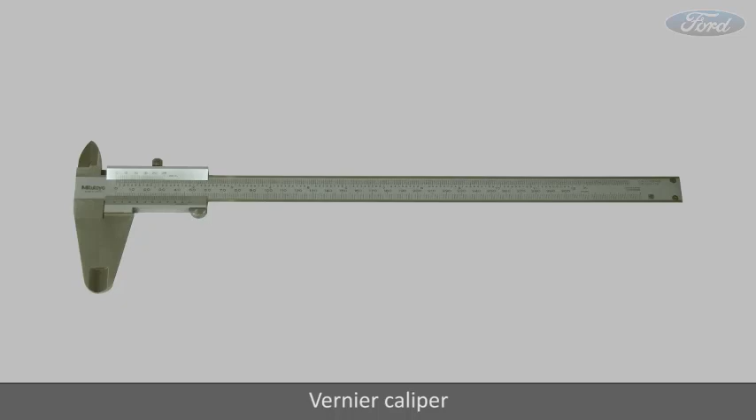The tools required to carry out this procedure are vernier caliper, inner bore anvil gauge, digital dial gauge, micrometer.

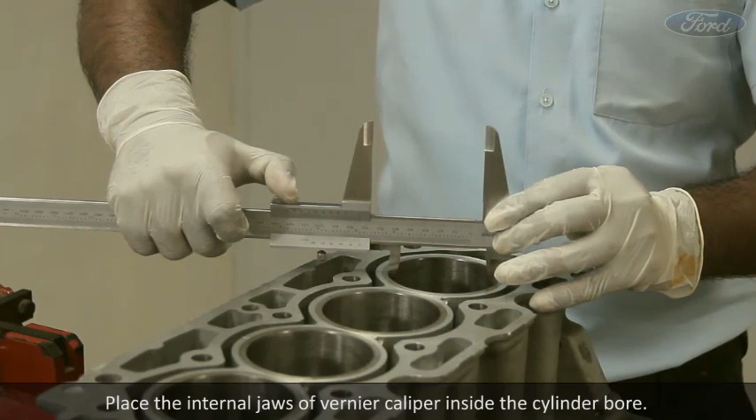Procedure. Step 1. Place the internal jaws of vernier caliper inside the cylinder bore. Step 2. Make sure that the vernier caliper is placed parallel to the cylinder bore. Step 3. Record the maximum reading. This is an indicative reading to help us select the correct anvil.

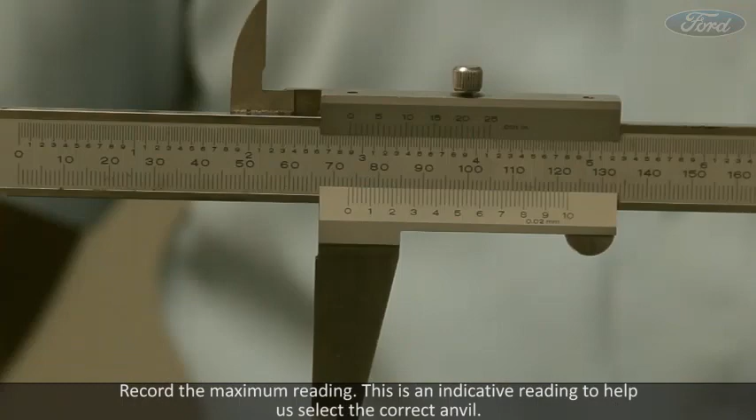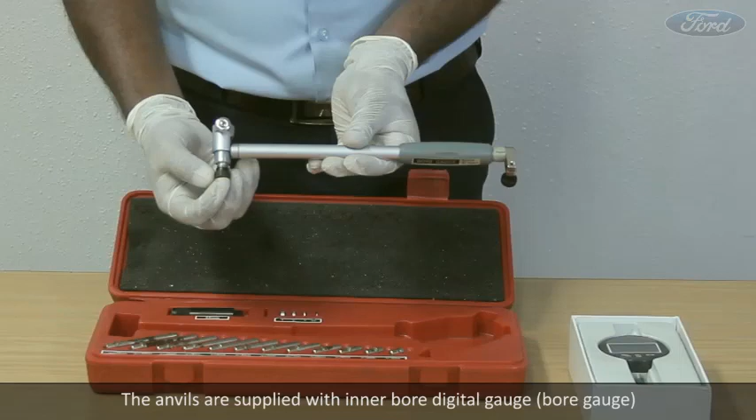Step 4. Use the reading from the previous procedure to find a suitable anvil. Step 5. The anvils are supplied with inner bore digital gauge, bore gauge. Reading is equal to 73.34 mm.

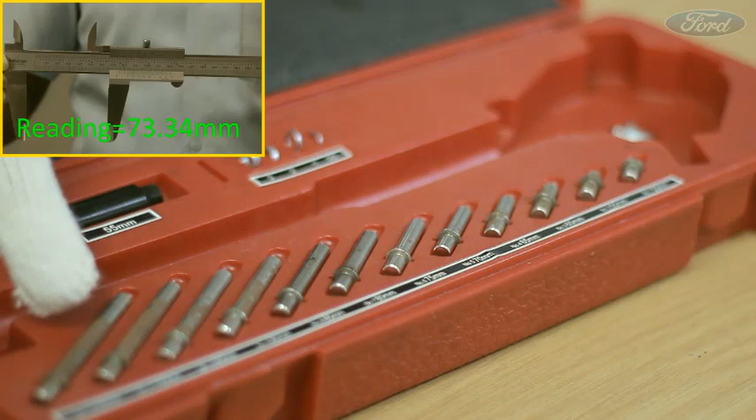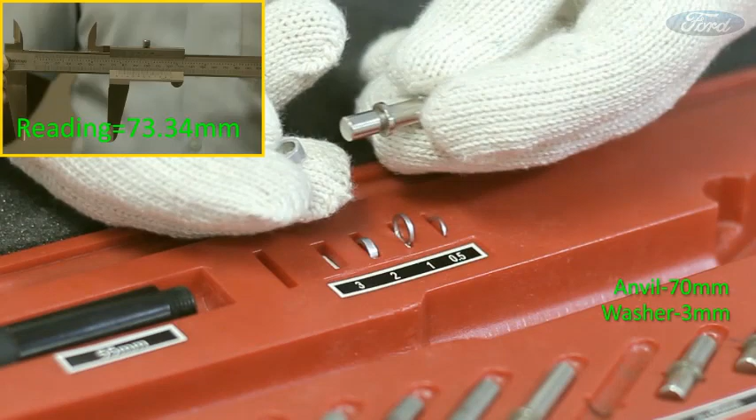Anvil is equal to 70 mm. Washer is equal to 3 mm. Washer is equal to 1 mm. Anvil length 70 plus 3 plus 1 is equal to 74 mm.

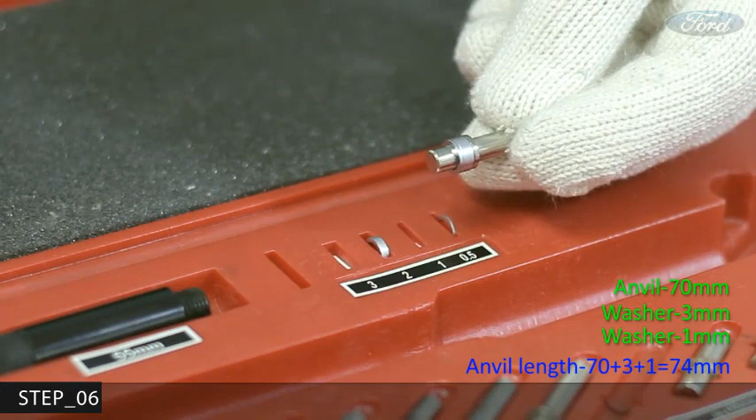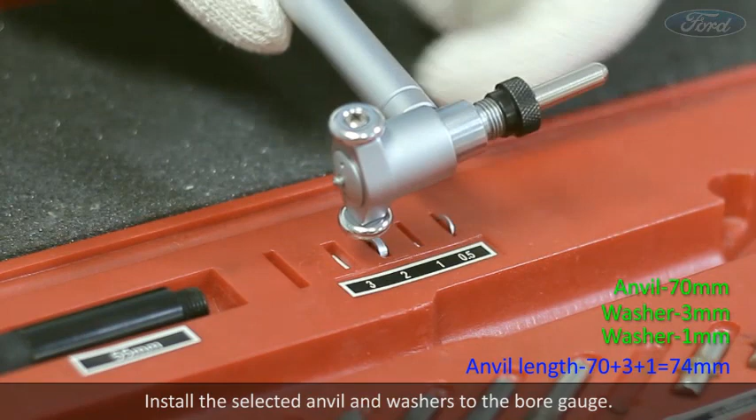Step 6. If necessary, use applicable washers supplied with bore gauge to adjust the anvil length. Step 7. Install the selected anvil and washers to the bore gauge. Step 8. Set up the bore gauge and zero out the readings.

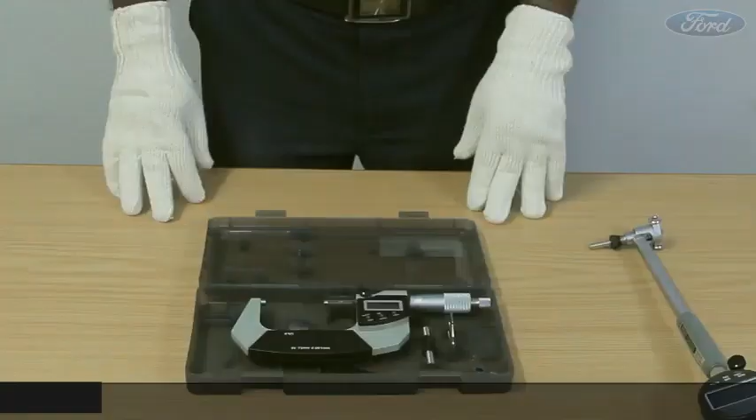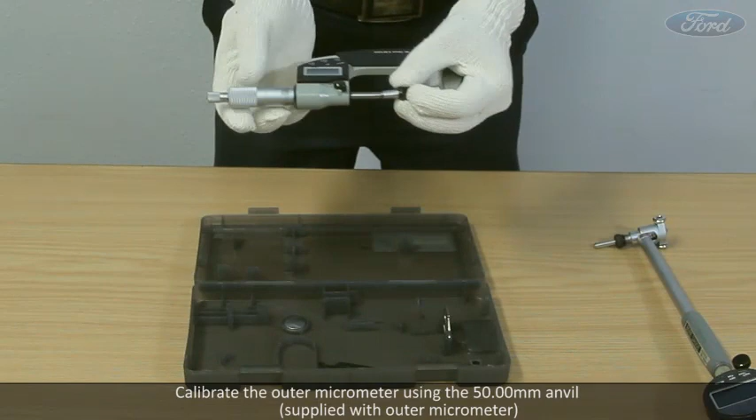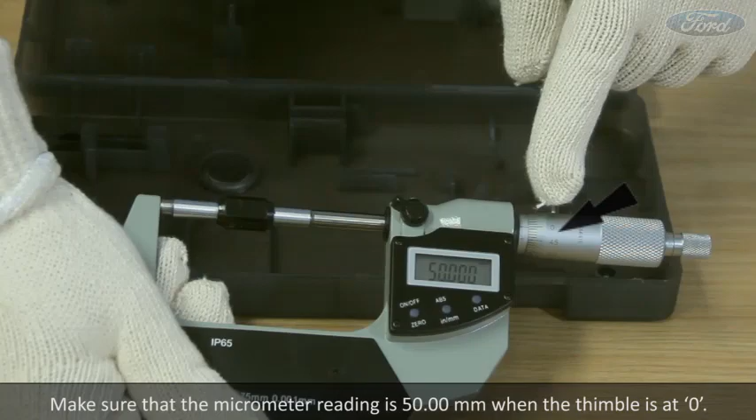Step 9. Calibrate the outer micrometer using the 50 mm anvil supplied with outer micrometer. Step 10. Make sure that the micrometer reading is 50 mm when the thimble is at 0. Step 11. Use outer micrometer to measure and calibrate the bore gauge.

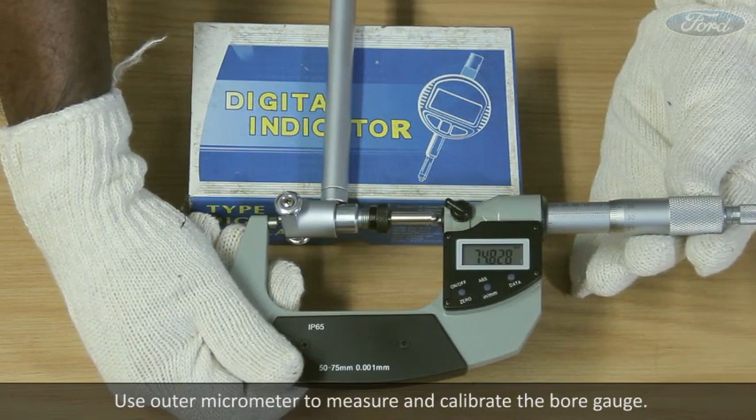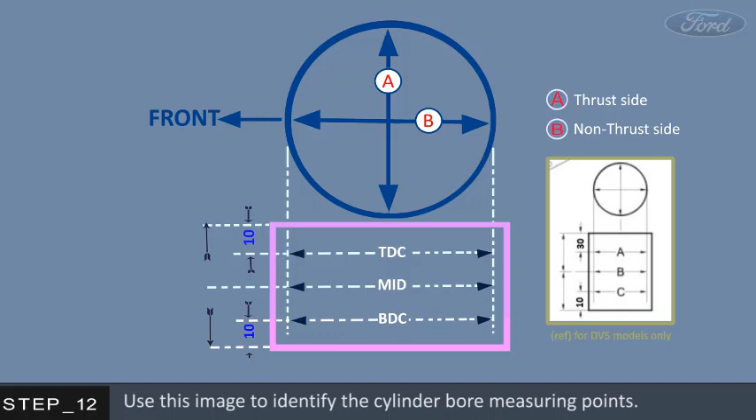Step 12. Use this image to identify the cylinder bore measuring points. Step 13. Use the depth measuring vernier caliper and a marker to mark the cylinder bore length at 3 positions. Mark the TDC and BDC points. Refer the workshop manual for that particular model. TDC and BDC values are different for each model.

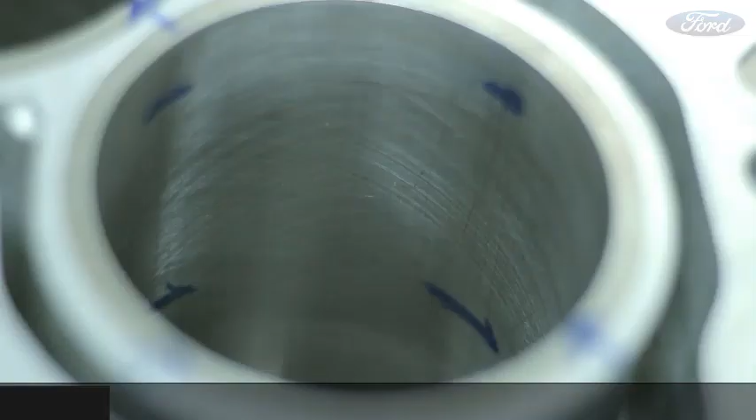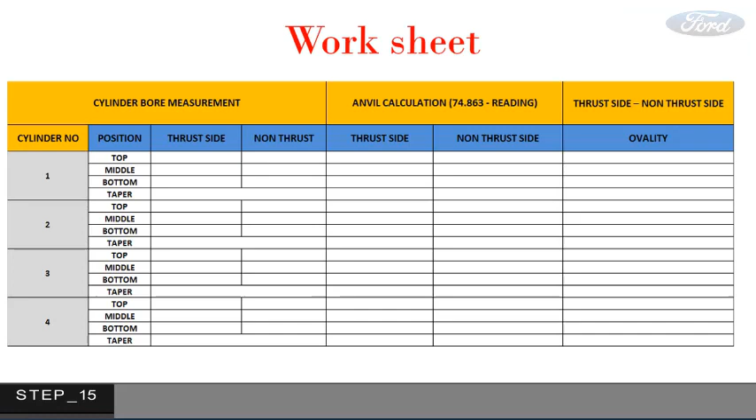Step 14. One at the bottom, one at the middle and the remaining at the top of the cylinder bore. Step 15. Use a worksheet to note down the cylinder bore measurements. Step 16. Make a note of formulas and use these for final calculations.

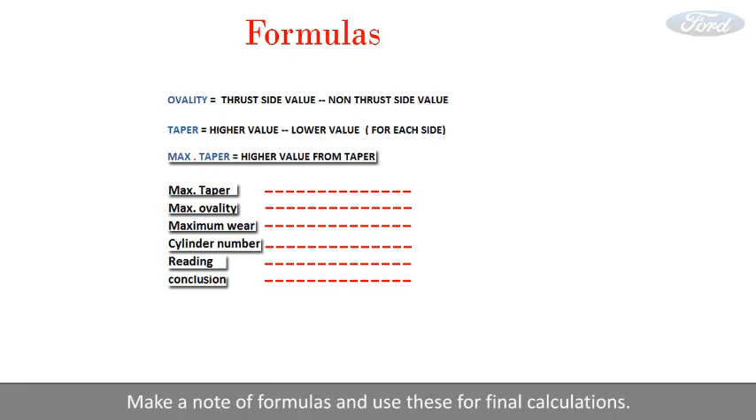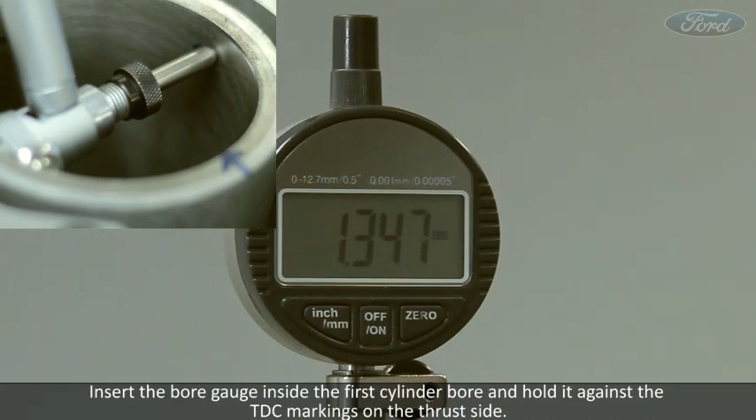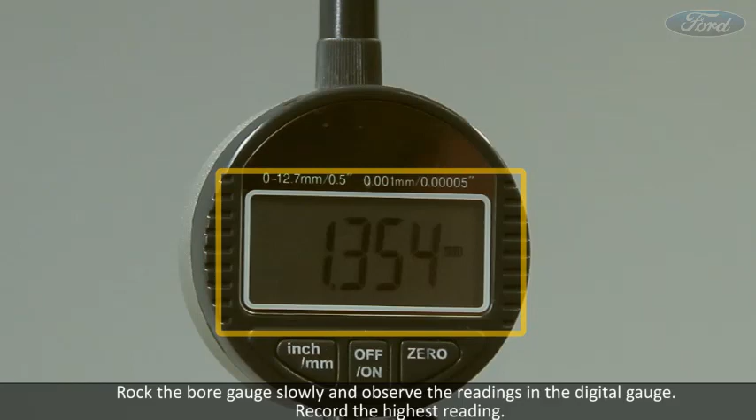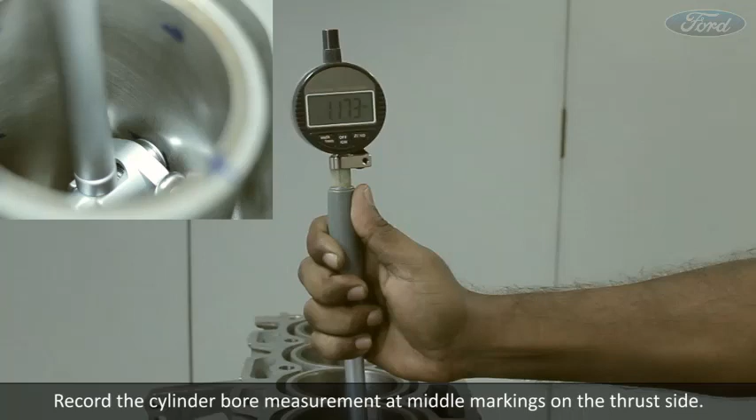Step 17. Insert the bore gauge inside the first cylinder bore and hold it against the TDC markings on the thrust side. Step 18. Rock the bore gauge slowly and observe the readings in the digital gauge. Record the highest reading. Step 19. Record the cylinder bore measurement at middle markings on the thrust side. Step 20. Record the cylinder bore measurement at BDC markings on the thrust side.

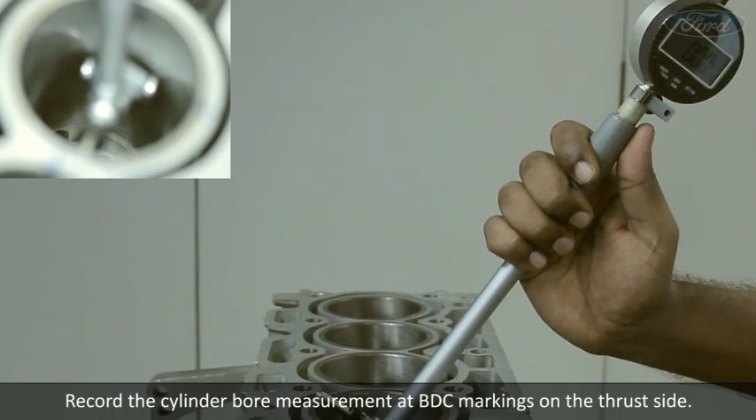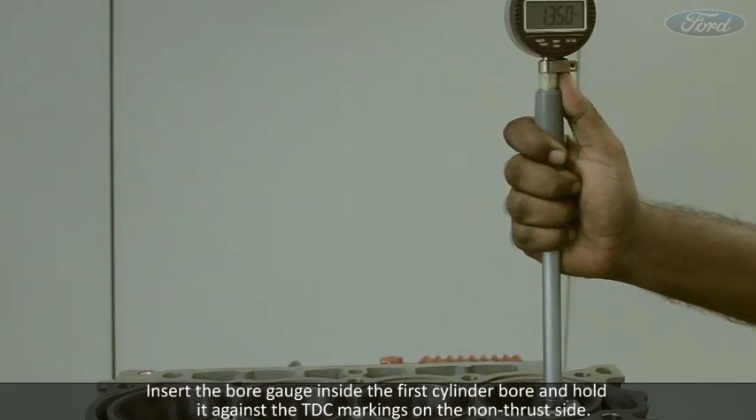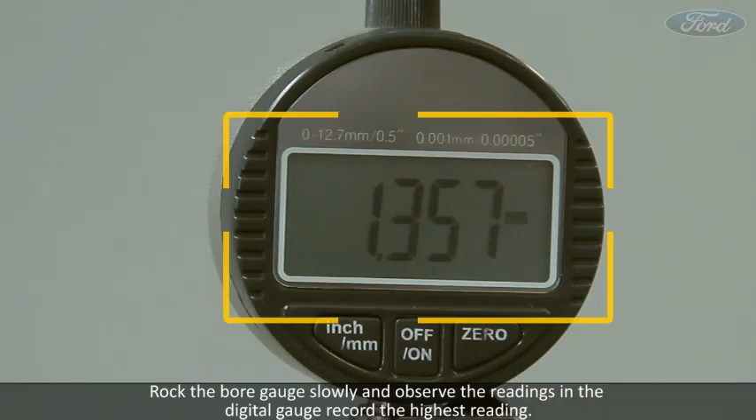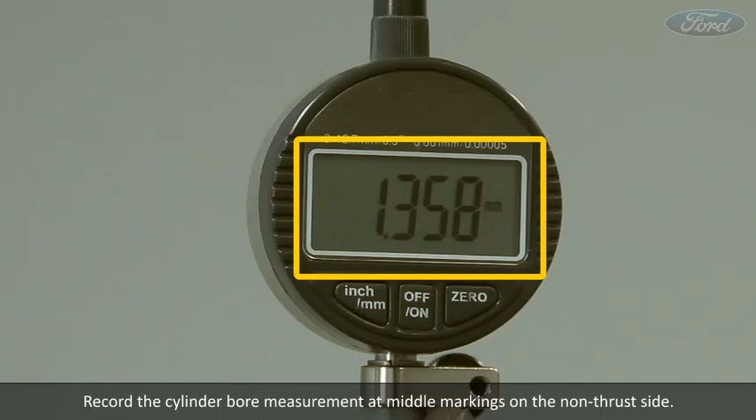Step 21. Insert the bore gauge inside the first cylinder bore and hold it against the TDC markings on the non-thrust side. Step 22. Rock the bore gauge slowly and observe the readings in the digital gauge. Record the highest reading. Step 23. Record the cylinder bore measurement at middle markings on the non-thrust side. Step 24. Record the cylinder bore measurement at BDC markings on the non-thrust side.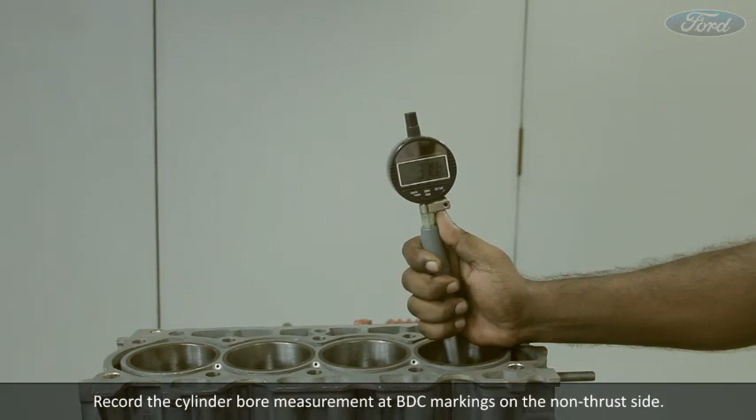Note: follow the measuring procedure from step 17 to step 24 for completing the remaining cylinder bore diameter measurement. Cylinder bore measurement calculation. Formula:

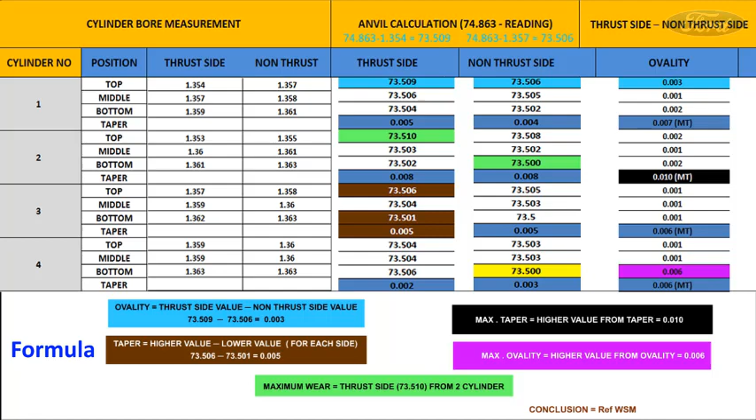Note: the readings shown in the videos are for representation purpose only. Compare the value with workshop manual for any abnormalities.